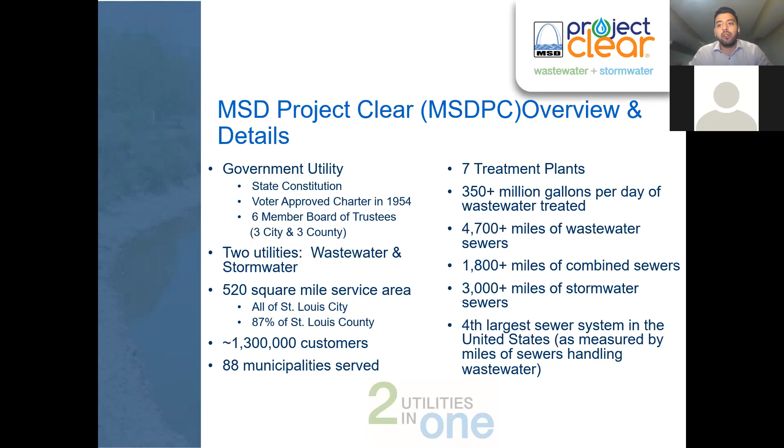The reason why I point that out is because the project we're here to talk about tonight is on the wastewater side. You might be hearing that called the sanitary tonight, but that's the wastewater system, and we're not talking about the stormwater system specifically. So that's it for the general overview.

At this point, I'll go ahead and let the project team introduce themselves, starting off with Jared. Jared, if you don't mind.

Oh, yes, I'm Jared Barr, project manager with the district. I'm a civil engineer, and this is my contact information. I manage the project for the district side, and then we have our outside consultant and other MSD engineers as well. I'll go ahead and allow Dave Hasty to introduce himself and the others in the team.

Good evening, I'm Dave Hasty, civil engineer with Wood. I'm the lead on the consultant side. And go ahead, Mariah.

Hi everyone, my name is Mariah Manus, and I'm a project engineer here at MSD. I'm going to be assisting in this presentation. So we can go ahead and go to the next slide.

So just to give you a project overview, this project originated due to complaints in the neighborhood. So we sent our MSD planning group out there to evaluate and study the area, and they came back with 3 main problems identified. The first one, leaky pipes are allowing groundwater to get into the wastewater pipes. The second one, wastewater pipes are too small to carry all of this extra flow. And the third problem is wastewater pipes are then overflowing and backing up into basements.

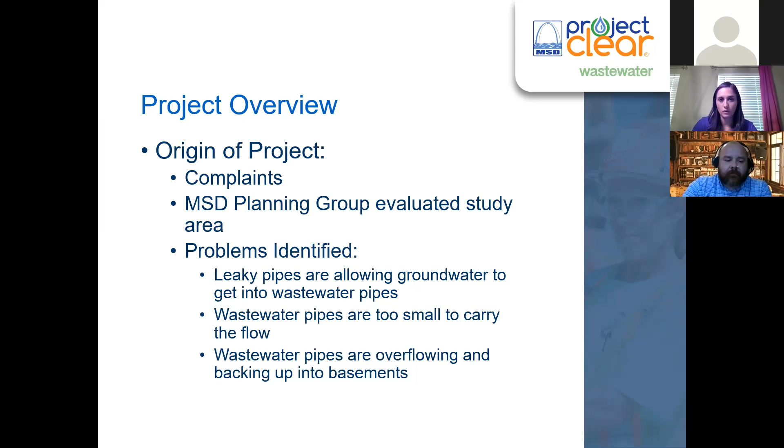Next slide please. So the goal of our project is to increase the system capacity to a 10-year level of service. This just means we want to increase the size of the pipes, so then we increase the capacity so it can carry all of this flow. The benefits by doing this are we reduce the basement backups and we reduce the wastewater overflows. A wastewater overflow is a point in the system where untreated wastewater gets into creeks, streams, and waterways. By doing this, we will benefit about 2,185 properties.

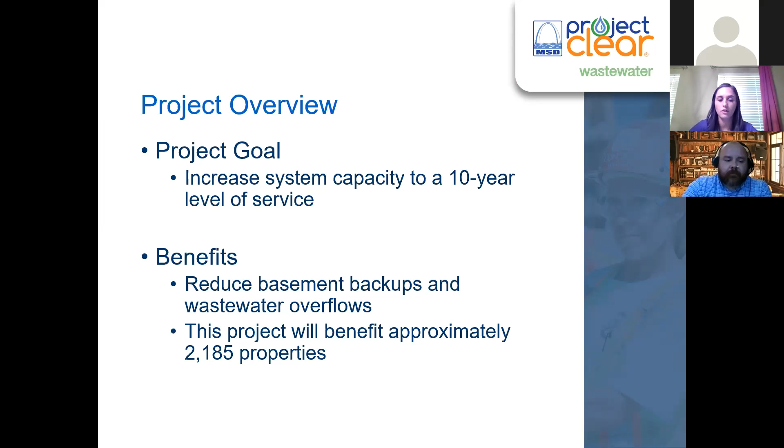Next slide. So the scope of our project is going to be to construct 6,000 feet of new wastewater pipe. Let's go ahead and move to the next slide so we can see what that looks like.

And so we're actually going to construct this in the opposite direction. So construction will start around West St. Anthony Lane and move towards 270. So looking at your screen, following the red line, it'll go from right to left.

When we get to 270, we're going to use the construction method called tunneling, and we have coordinated and worked with MoDOT in their ongoing 270 project about this tunneling method. So now I'm going to pass it over to project manager Dave Hasty, and he's going to go in more detail about what tunneling means and other construction methods and project specifics. Dave?

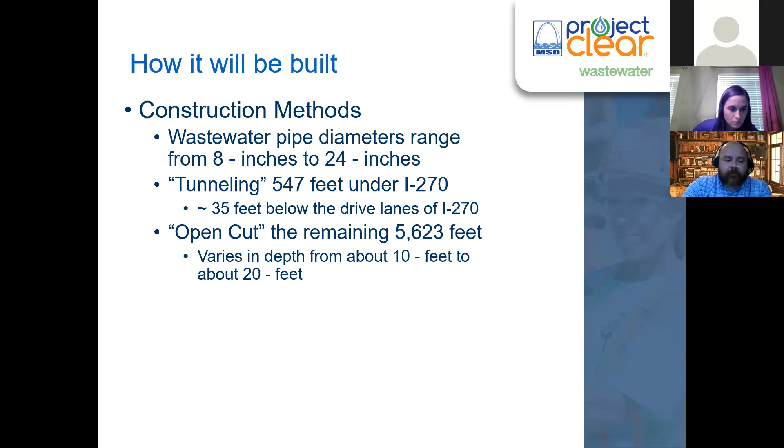As Mariah mentioned, the section of pipe under I-270 and Dunn Road will be tunneled. The contractor will dig a pit on either side of I-270 and tunnel between without cutting down from the surface, so as not to disrupt traffic on I-270. We've also coordinated this with MoDOT regarding their ongoing highway construction project.

From that point down to the north end will be open cut construction, where the contractor will excavate a trench, install the pipe, and backfill it. A significant length of the project will be constructed in South New Florissant Road, a very busy road with 2 northbound lanes, 2 southbound lanes, and a center turn lane. The new pipe will be constructed in the right northbound lane, the lane closest to the sidewalk.

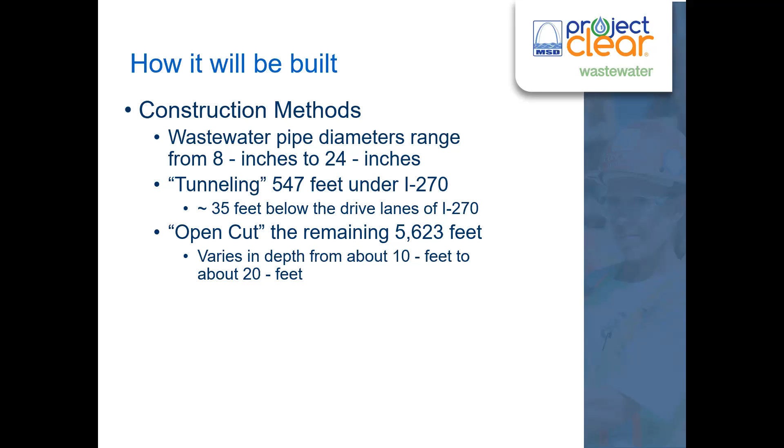Most of the project will be constructed in public street right-of-way. However, there will be a need for six new easements on private property. Permanent easements give MSD the right to construct and maintain sewers, and include working room alongside the 10-foot strip for staging and construction. Temporary construction easements give MSD the right to excavate and remove trees, but no permanent improvements are left behind. These expire after construction is complete, leaving just the 10-foot permanent easement. If an easement is needed on your property, an MSD right-of-way agent will be making contact with you.

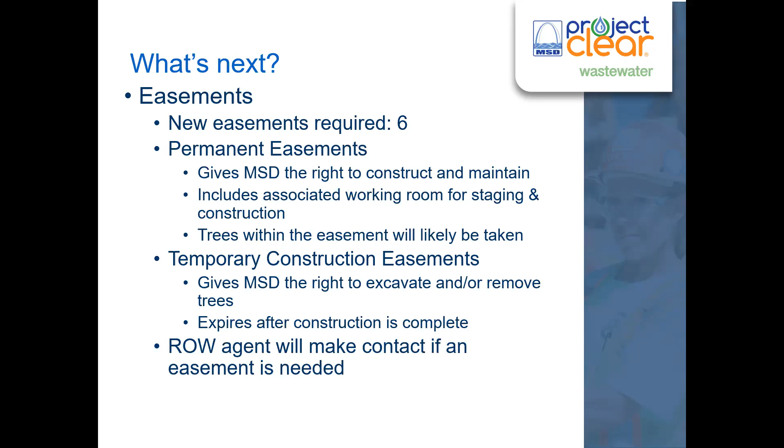With open cut construction, you can expect some temporary traffic disruption—trucks and construction workers busy during the day. The contractor will bring in equipment and construction material before they start installing sewer, staging it along the alignment as they install the sewer down the line. Equipment such as excavators, track excavators, and bobcats will remain on the project for the duration. Where the sewer is being installed is where all the action will be, moving from the lower end at the north to the upper end at the south.

There will be lane closures on South New Florissant Road, but at least one northbound lane will remain open at all times. There's a little bit of work in St. Anthony and Elm toward the north end, and there may be times when those streets are completely closed, but there are alternate routes to access South New Florissant Road. At least one lane should remain open during construction, but there may be times near the center of the street when it's completely closed, and traffic will be routed around.

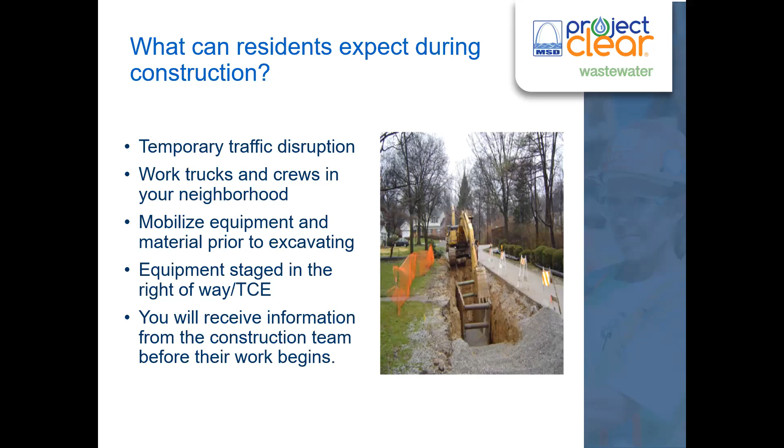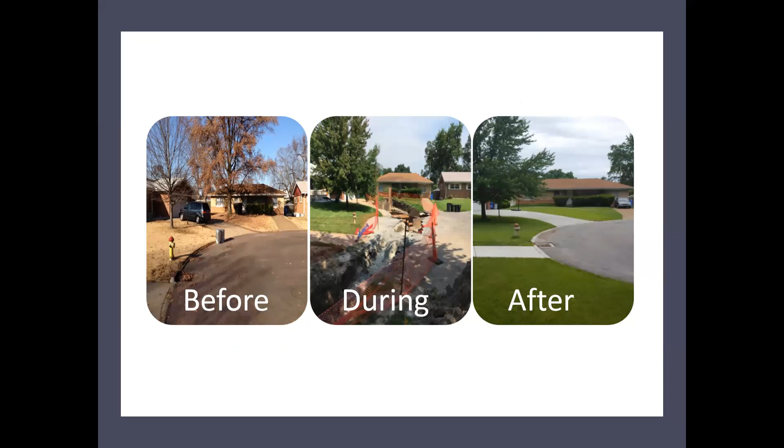Next slide, please. Prior to the start of construction, MSD will organize a neighborhood meeting with the contractor and property owners, probably similar to this meeting we're having right now. The contractor will notify you at least 7 days prior to construction on your property. Pipe installation should advance about 50 to 100 feet a day. After the pipe is in the ground and backfilled, the contractor will restore the project in sections, so paving and sodding will not necessarily happen immediately after the pipe's in the ground. The restoration is somewhat dependent on the weather and time of year.

Sodding doesn't normally occur in the hot part of the summer, and installation of asphalt pavement can't happen in very cold weather. So there'll be maybe some delays there with the restoration.

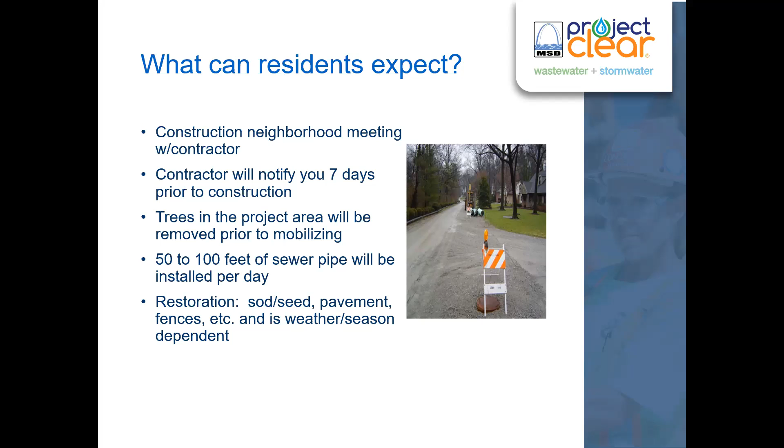The MSD inspector travels between several construction sites, and they would typically visit each site a couple times each day. The inspector will be on site at least once every day, if not twice. If you have a problem, you should contact the inspector and not the contractor.

Property owners may make special agreements with the contractor for construction work on their private property. If you make a special agreement with the contractor, you should get it in writing and provide a copy of that to the inspector. With the agreement in writing, MSD can assist if the contractor doesn't honor his commitment.

With regard to schedule, design will be complete this fall, late summer, early fall. Easement acquisition will be complete the summer of 2022. And construction will start early 2023 and last approximately 24 months.

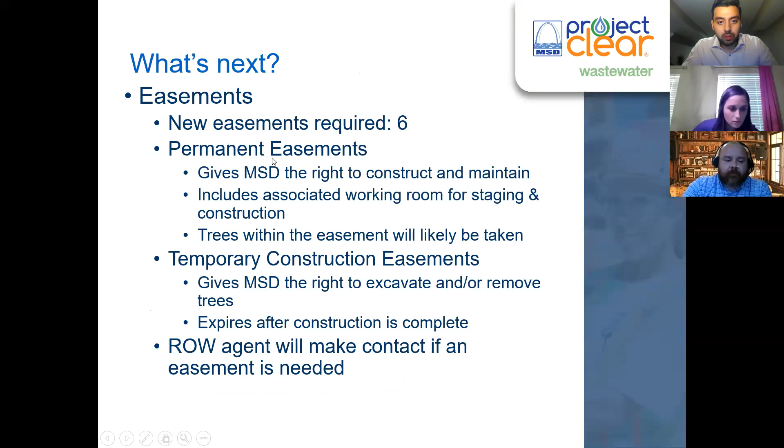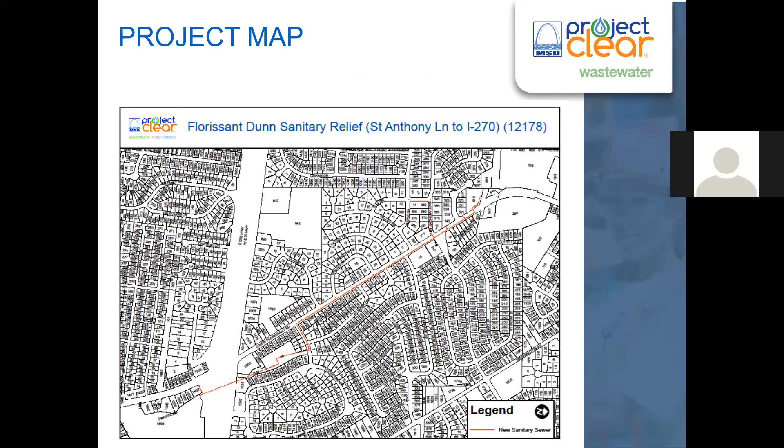Dave, it might be easier if I go back to the map as well. Dave, whenever you're ready, if you want to take that one. Okay, yeah. Oh, you have the drawings up there. See, go to... I'm just looking at this. Do you have the whole set or just the cover sheet?

Sorry about that, that was the drawings that I opened. I thought you had opened them, Sod. Oh, no.

Dave, would you like me to talk a little bit about what's going to happen in Elm? This is Mike Smith. Sure, I'm trying to find it here. Yeah Mike, if you want to take that, please go ahead. All right.

The line in Elm is being replaced with a new 15-inch pipe that's going back pretty much parallel to the existing pipe on the east side of the street. So the intent is that we'll put the pipe on the east lane of traffic. I realize that's new pavement there, I really hate tearing it up, but we'll probably end up taking out the slabs on that side of the street. That goes from West St. Anthony up to the intersection of Maple Drive, so it would be that one block area.

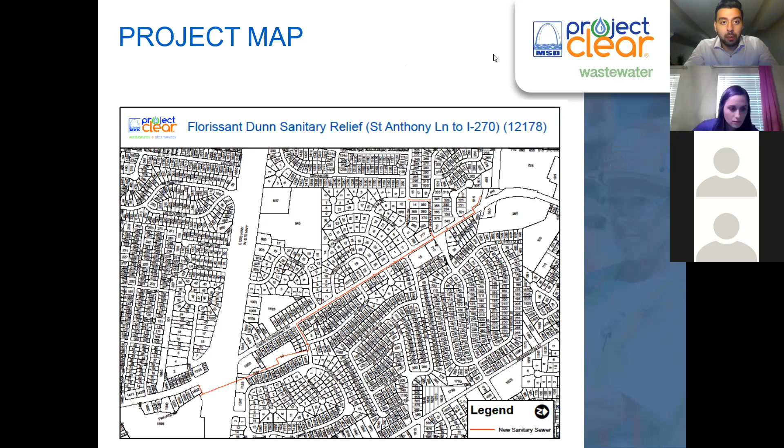We will go - oh, one more. Okay, one from Doug. Yes, Doug, I do see your question about your specific property. I believe Jared has reached out to you via email. We'll make sure to follow up with you about that specific property question as well. Thanks, Doug.